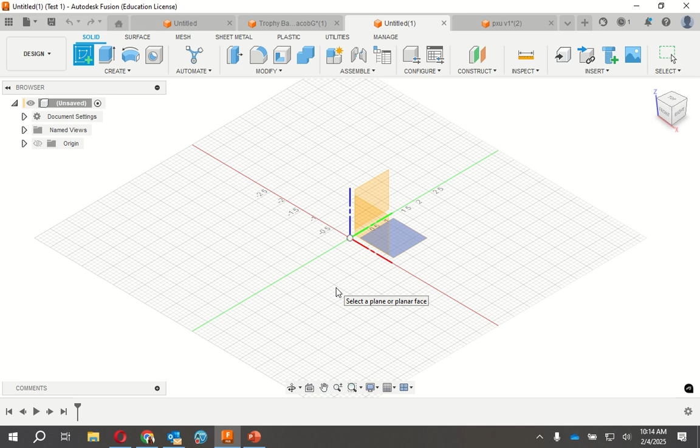Okay, so we're gonna do the trophy base right now. Start by creating a sketch. Now a lot of people are making this wrong. When I'm seeing your guys' assignments, they're in the wrong orientation. Make it flat, like this, because otherwise it makes it more difficult to CAM it. So right here, plane.

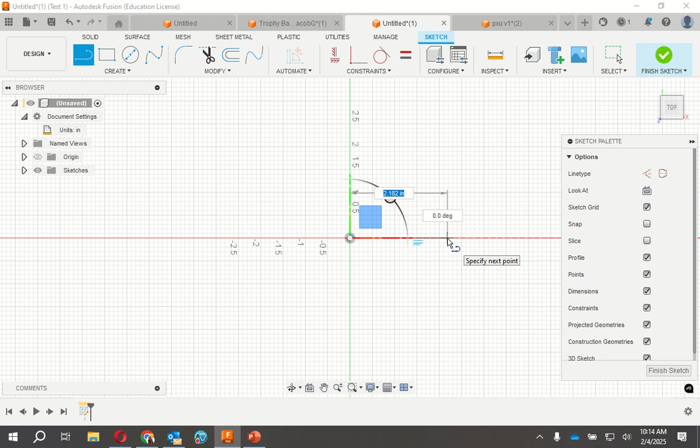Now this is what we're gonna do. We're gonna start by drawing a line right here. Oh wait, before I do that, our settings is inches. Make sure that's inches. Okay, so now I'm gonna go from here, and I'm gonna go this way at 0 degrees and 3.5 inches. Bam, hit enter.

Is that complicated? All right, do it again. Now from here, I go up. What's the total height? 0.75. Up 90 degrees, 0.75. There we go.

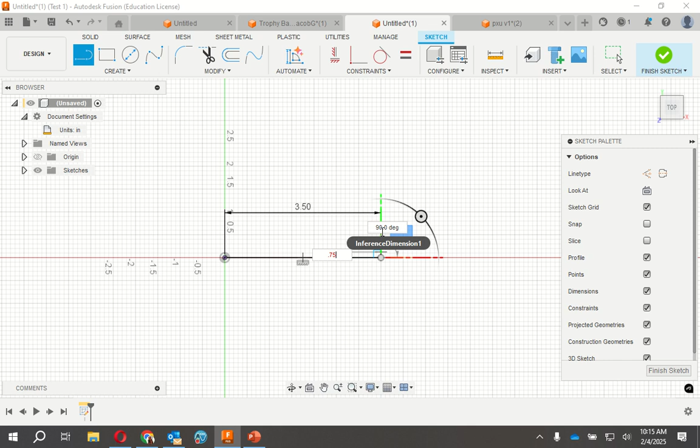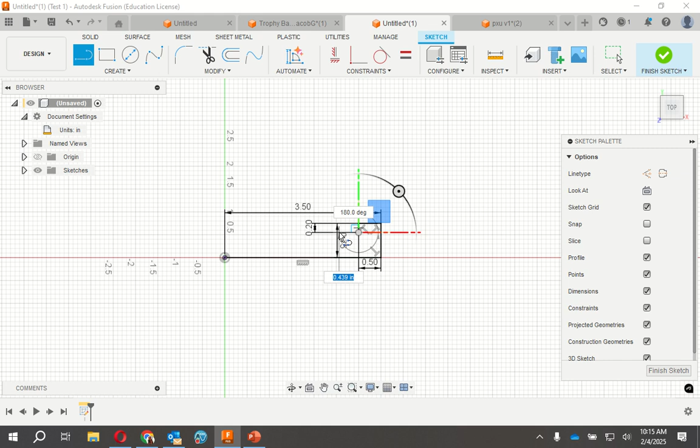Continue it. From here, it is over 0.5. From this endpoint right here, it is down 0.2. This right here, it is over, the thickness is 1 inch. This one goes back up 0.2. And from that line right there, I go over 1 inch.

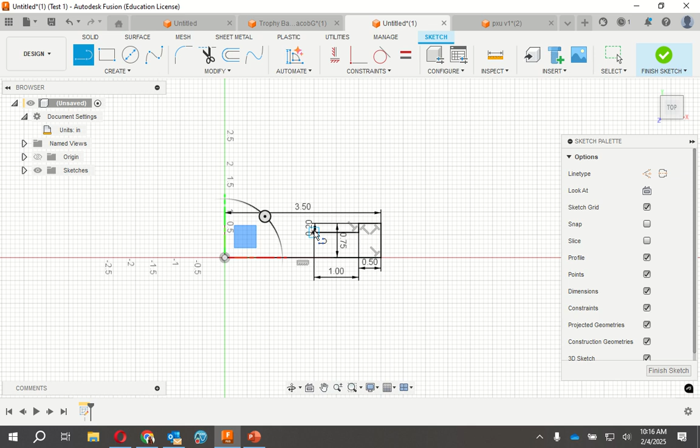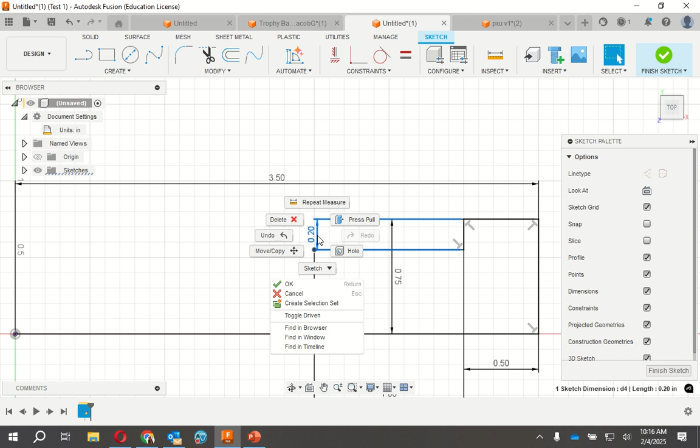All right, I don't see the line there. Let's try it again. Straight up 0.2. There we go, now there's the line. Now from here, this one over, and it is over 1 inch. And from there, I'm going to take that line, and it goes back down to the beginning.

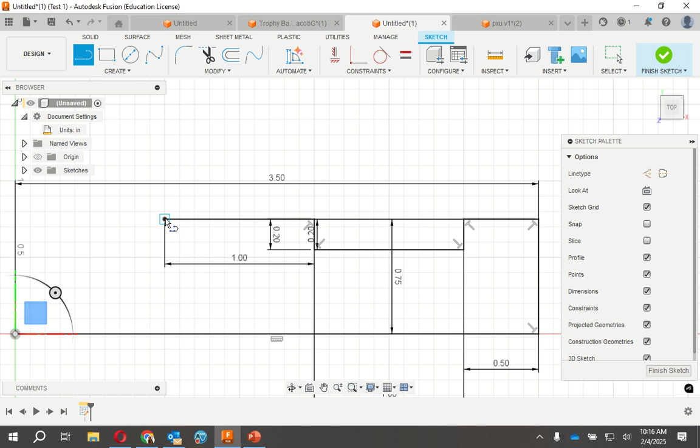Super easy, right? So now I have the side view. It's all shaded in, this is the part that I'm using. Right click on it, pull it. So right here, I'm pulling it one direction, and this is 8 inches.

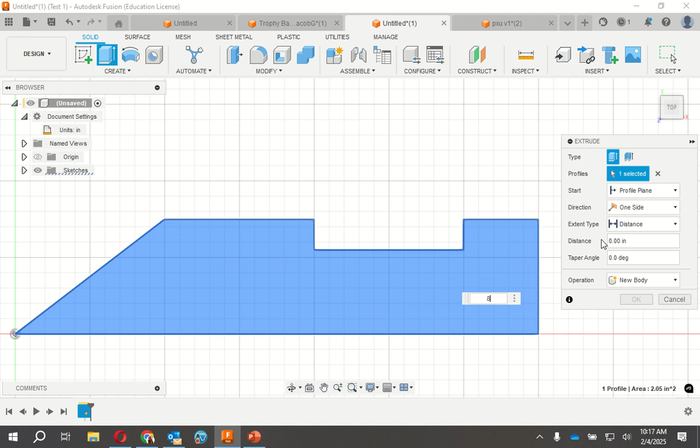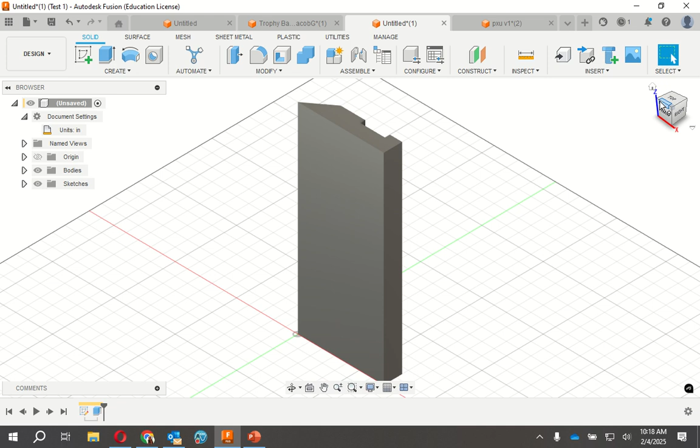Ah, dang it, I did the thing I didn't want you guys to do. Stop it. Why is... Come on. There you go. And then, all right, there we go.

Right here, so I'll show you this part right here, and it's right in the middle. So I'm going to do a line. Create sketch, and select it on this piece right here, because this is where it's going to happen in this channel. Right there.

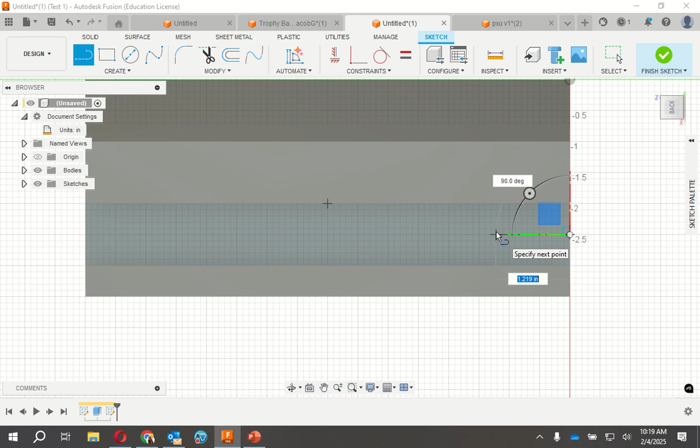Line right here. You could actually, as long as you put it the right spot, it's going to give you the little icon that it is the midpoint. Go over, and it says 1 inch over. So now that gives me an endpoint. Right click on that endpoint and make a hole, so this is almost the same as what we did for that light switch.

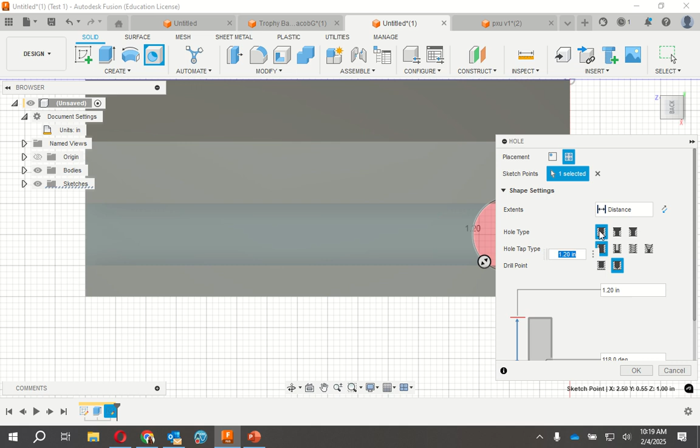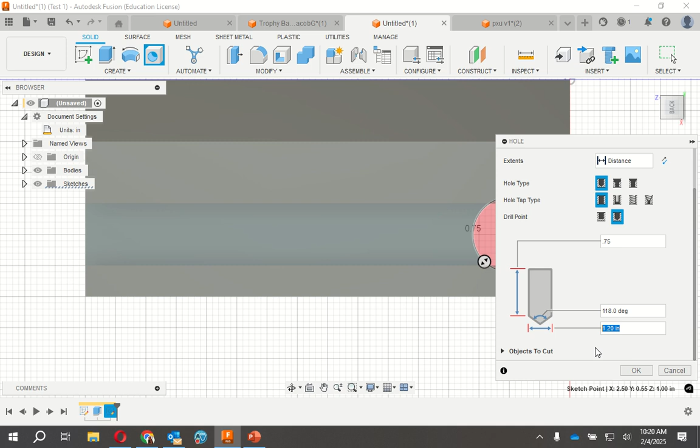So hole type here: hole tapped all the way through, drill point all the way through, and distance, the thickness of this is 0.75, so that's the thickness of the entirety thing. And let's see, it says radius, so this gives me the diameter, and I think I did 0.2 on mine. It doesn't matter. So 0.2 is going to give me the hole. That's an okay size hole, maybe 0.25.

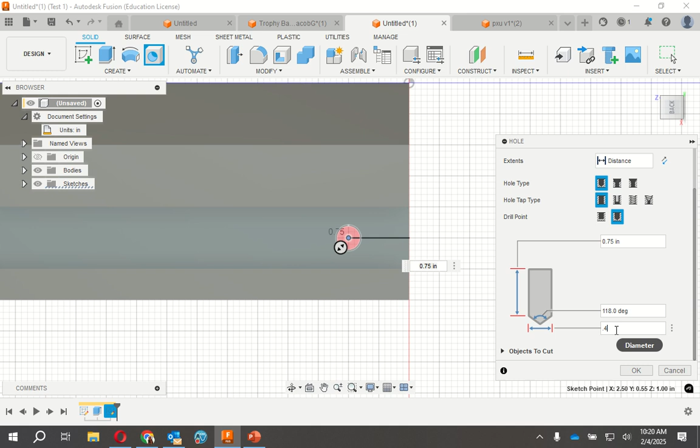Because when you make yours, yours has to fit with your top going into that hole to hold it in place. So if you guys are looking at my trophy, mine actually has holes on top and bottom, I was just showing where my trophy went. Okay, yay, there we go. So I have that hole, I made it 0.4 so hopefully that will be a good size. 0.4 instead of 0.2? Yeah, I just made it bigger. But either way, you're going to have to measure it for yours.

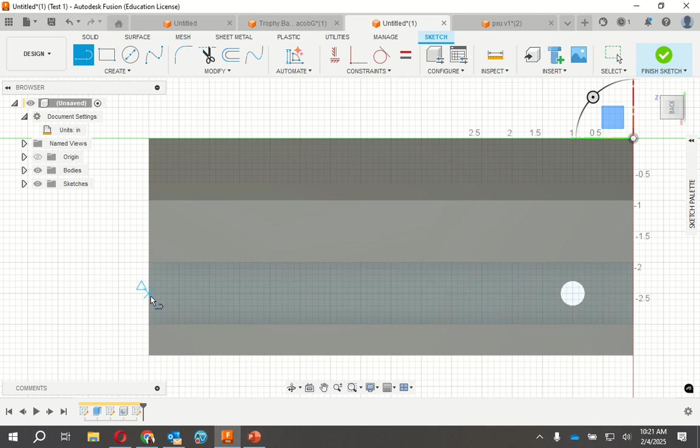I'm going to pan over and do the same thing again. Create sketch here, and I hate that it keeps doing this. I do this, select the midpoint, go over 1 inch. I got my hole, right click, hole, same thing here, change this to 0.4. 0.75, everything the same, yep.

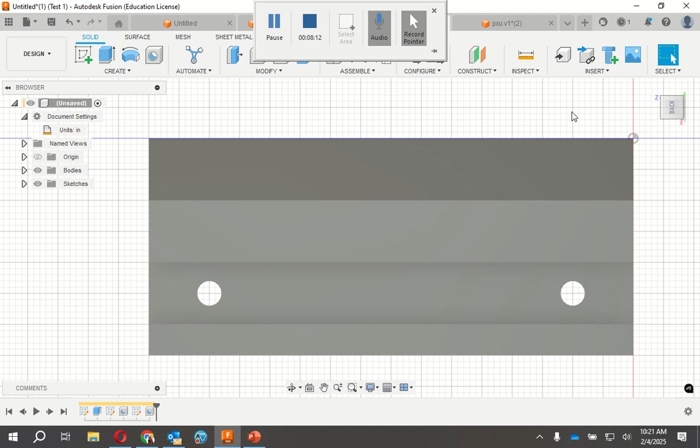There we go. Now, within what's that, 10 minutes maybe? Yeah, still less than 10 minutes. But I'm going to do one more thing. Are you going to put your name on it? Yep.

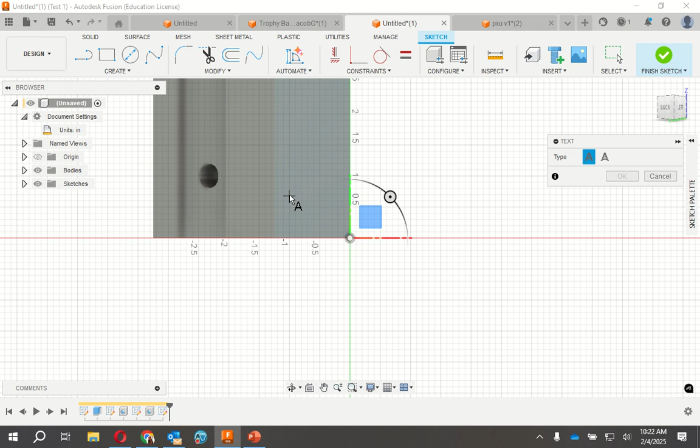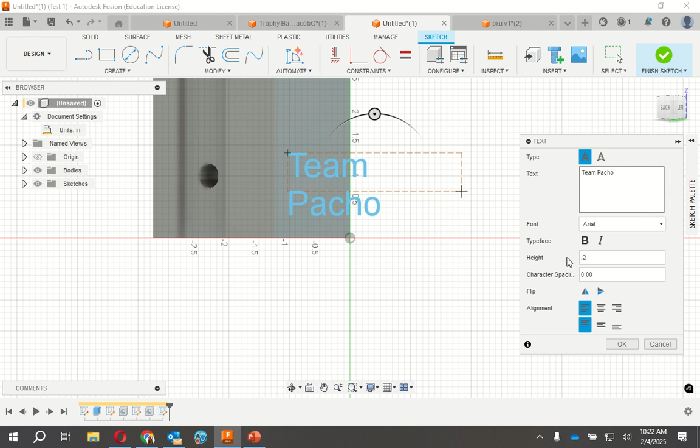So I kind of have it cockeyed backwards here, so it's leaning forward. So I'm going to select this plane here, the diagonal, and I am going to create text. Let's see, 0.2 is a good size. Let's see here.

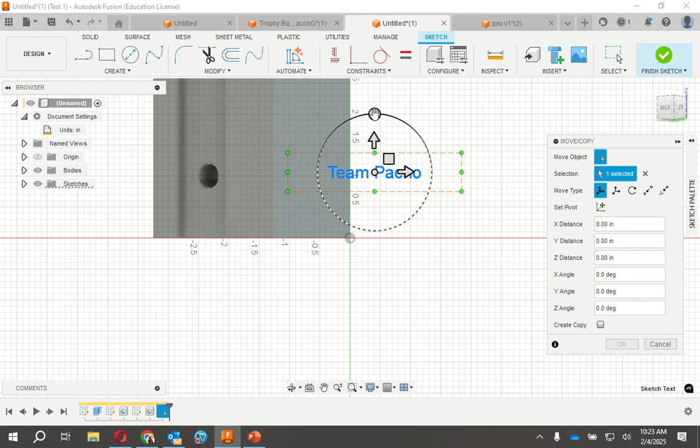All right, let's rotate it this way. Here. Right click on it, press pull. Now this time, instead of actually pulling it forward, we're going to push it back, so it's going to make an indent instead.

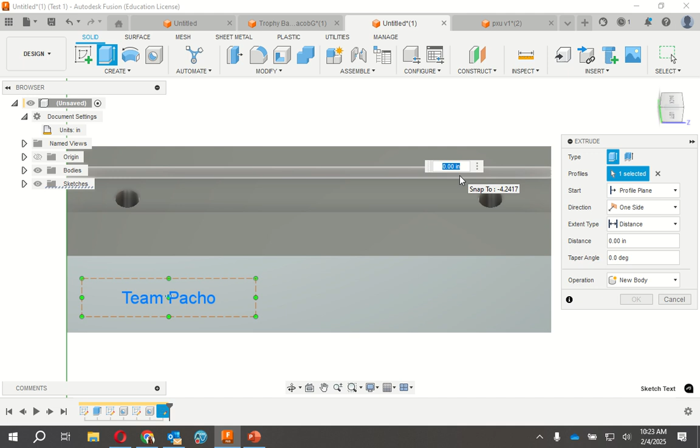You're going to engrave it instead? Yeah. So it's going to sketch it in, and I'm going to put negative 0.1. And make sure its operation is set to cut it in.

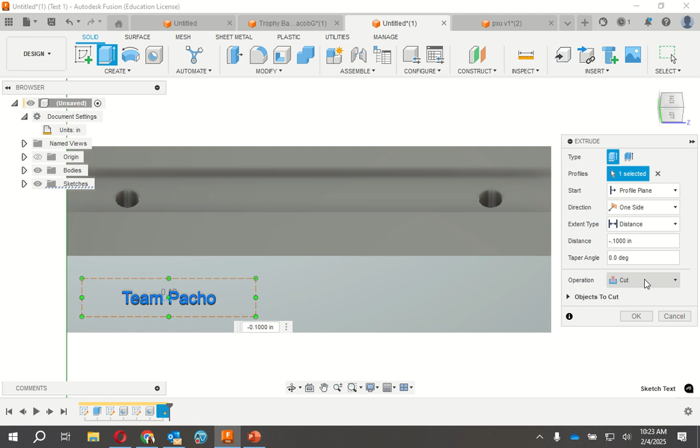There we go, and so I could actually, let's see, look at it from the side. Right here, I can see that it pops out like that. So I can see that it's going to pop out. So when I go and look at it, it will come through.